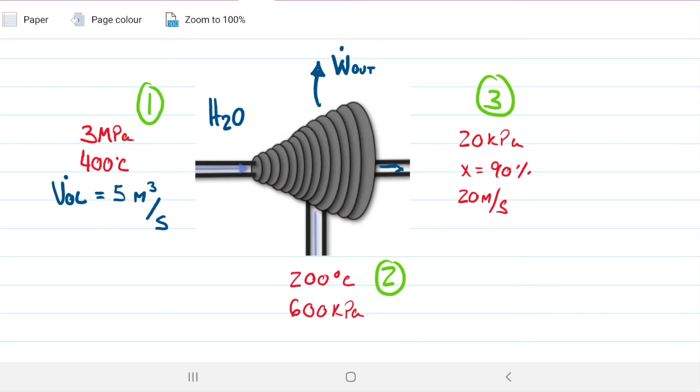The idea is quite simple. We have a turbine, represented by this guy here, and we have steam coming in, and we have steam coming out from two different outputs. And the idea is to apply the continuity equation to find what are the outputs in terms of mass flow rate and volume flow rate.

Now, the continuity equation tells us the following. If we have a steady state, that is, a state in which we have a constant flux of mass coming in and out of our control volume, which is our case here, if you take this as being our control volume, then that means that all the mass coming into this guy eventually leaves from one of the exits that's possible. In other words, we won't have water accumulating inside this control volume over time. We're always going to have that constant mass, so we're not going to have the amount of mass increasing or decreasing in the control volume over time. That's the idea behind the steady state, and that's when the continuity equation can be applied.

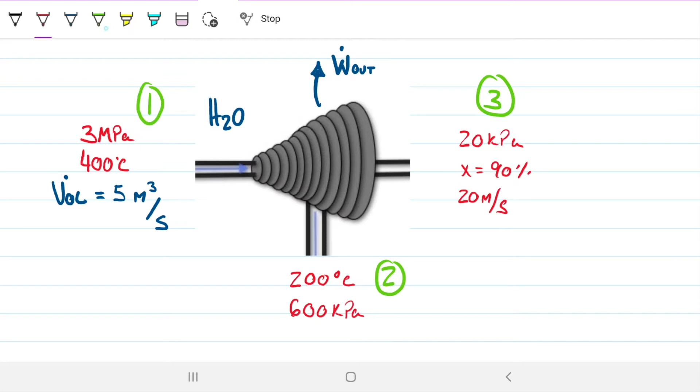So let's read the problem statement. A steam turbine receives 5 meters cubed per second of water vapor at 3 megapascals, 600 Celsius. The turbine has an intermediate phase where steam is extracted. The temperature and pressure of the steam in the extraction pipe are equal to 200 Celsius and 600 kilopascals. The pressure and the quality in the main discharge pipe of the turbine are equal to 20 kilopascals and 90% respectively. Knowing that the mass flow in the extraction pipe is equal to 15% that of the incoming vapor, and that the speed in the main discharge pipe is 20 meters per second, we are to determine the volumetric flow rate in the extraction pipe and the diameter of the main turbine discharge.

So it wants the volumetric flow rate on the extraction pipe and the diameter on the main discharge. So let's write this down quickly. Volume flow rate, I'll define like so, with the dot to indicate it's a rate instead of V, because we also have velocity in this case, so not to be confused. So I'm going to use vol for volume and V for velocity, and the diameter of one of the states.

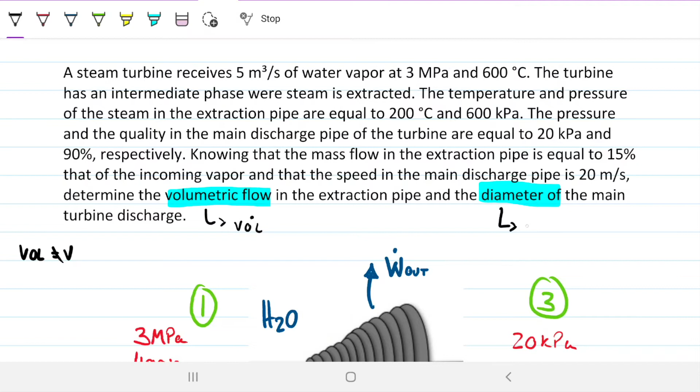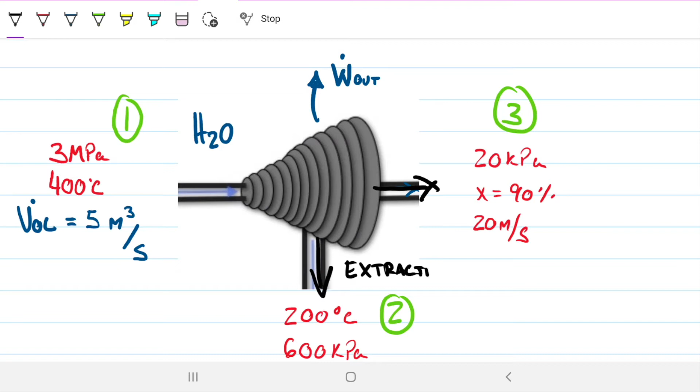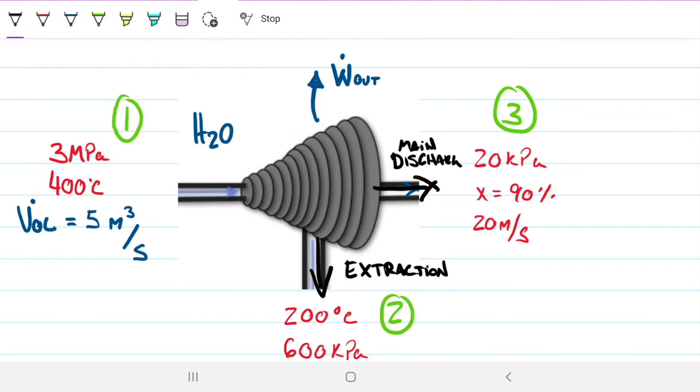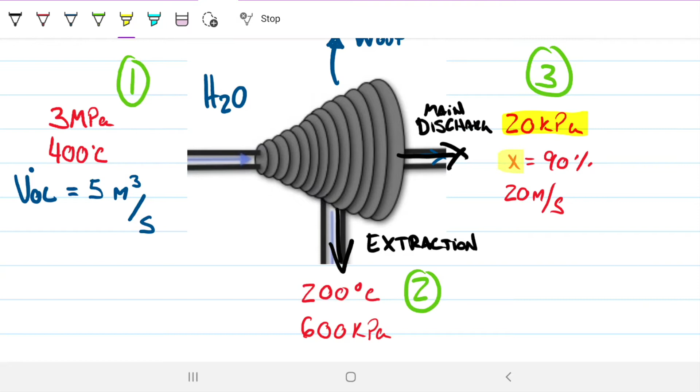So note that we have water coming in, vapor coming in, steam coming in here, and then we have two different places in which the steam is coming out. We have a discharge pipe there, we have the main discharge. So this is the one they call extraction pipe, and this is the main discharge. I've named them state 1, 2, and 3. I want you guys to notice that we have these states completely defined at every single instance: 3 megapascals and 400 Celsius, so two independent thermodynamic properties; 200 Celsius and 600 kilopascals, completely defined; and 20 kilopascals and quality of 90%.

So we can grab all the properties we wish for these guys here, that's 100% okay. Now, the other thing is that because of the continuity equation, because the mass is not staying inside that turbine, well, we can say that the mass flow rate 1, that is the amount of water coming in, has to be equal to the sum of the other two discharges coming out.

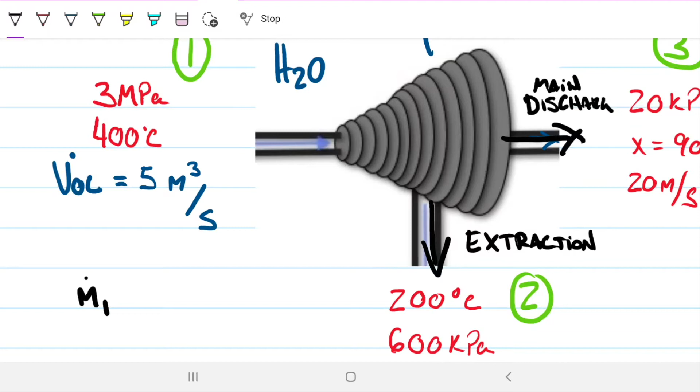Another way to think of this is like so. Let's draw quickly my turbine, just a little box for the turbine. What's coming in? We have state 1 coming in, and what's leaving in terms of mass, not in terms of energy, just in terms of mass. We have the extraction pipe here, which we call M2, so mass flow rate M2 for the extraction pipe, and a mass flow rate M3 for the main discharge. And incoming, we have mass flow rate 1.

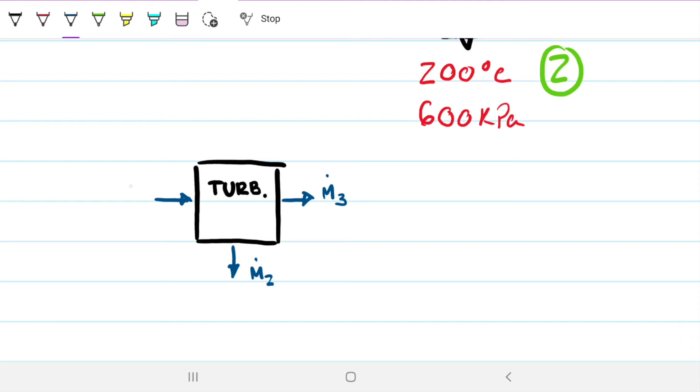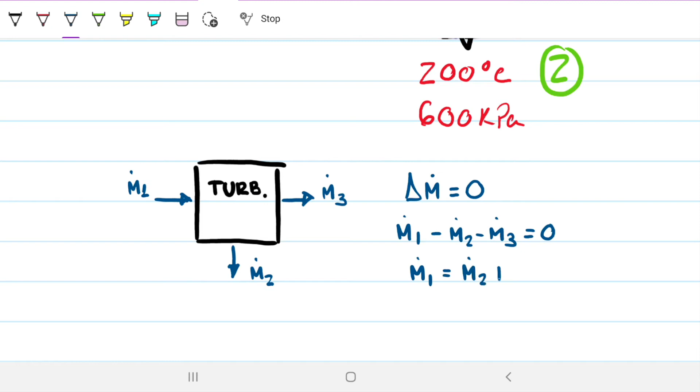So all the continuity equation is telling us is that the delta M has to be 0 as well. In other words, what's going in, M1, minus what's going out, M2 minus M3, has to be equal to 0. So the mass coming in M1 has to be equal to the mass leaving from M2 plus M3. What else do we know? We have an extra bit of information, which is that it's 15%.

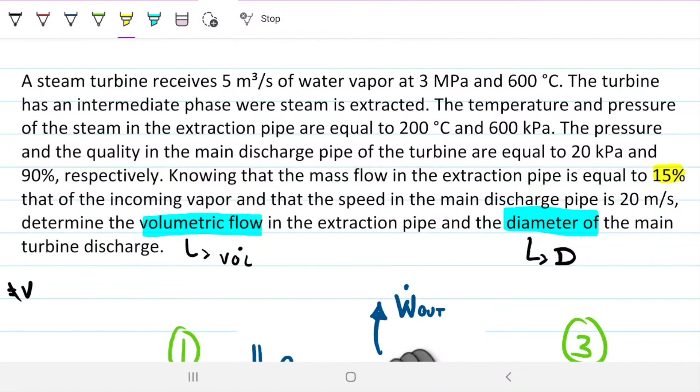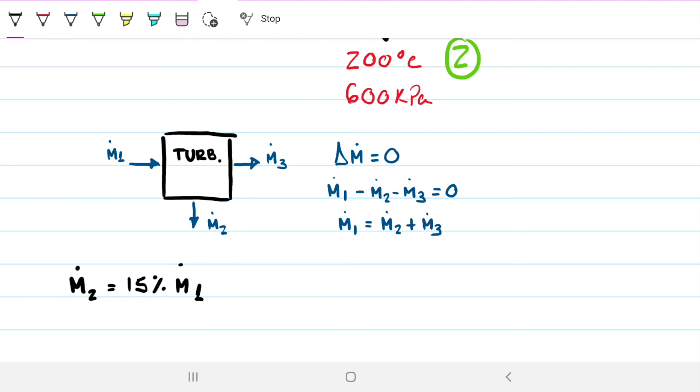Why is it saying that? Right here, we know that the mass flow rate in the extraction pipe is 15% of the incoming vapor. So this guy here in the extraction pipe is 15% of this guy here. So we can write that as well, as a second bit of information: the mass flow rate 2 equals 15% that of mass flow rate 1. So what we can do now is relate these volumes and masses and find everything we're looking for. We don't need to do any energy balance in this case.

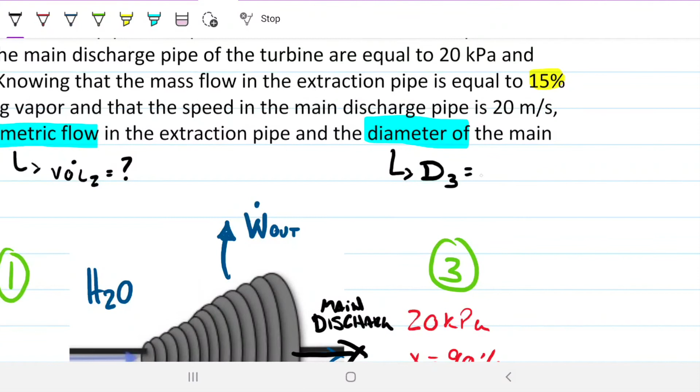Volumetric flow rate for extraction 1, that is volumetric flow 2, so this is what we're after, and also the diameter on the main discharge pipe, that's diameter 3. Okay, let's start with the volumetric flow rate.

I'm going to note that I can find the mass flow rate 1, because I know the volumetric flow rate of 1, and I can easily find the specific volume for 1. You don't need to memorize this, just look at the units: the volumetric flow rate is meters cubed per second, and the specific volume is meters cubed per kilogram. So the meters cubed go away and we're left with kilograms per second.

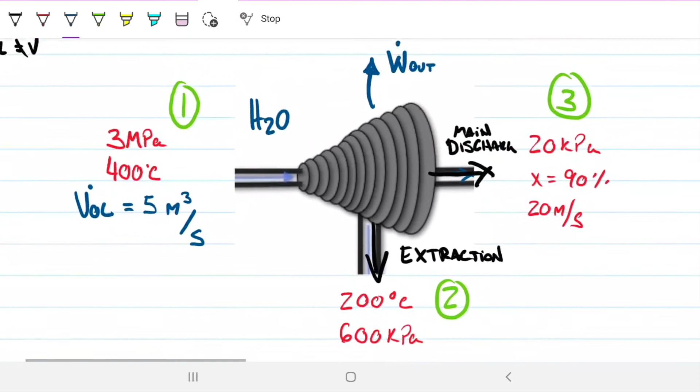That's exactly the mass unit for the mass flow rate. So that means that if we take the 5 that we already have and divide by the specific volume, we can find the mass flow rate. Let's just make sure we know what these guys are. As I said, they're completely defined, but let's confirm whether each state is saturated, compressed, or superheated.

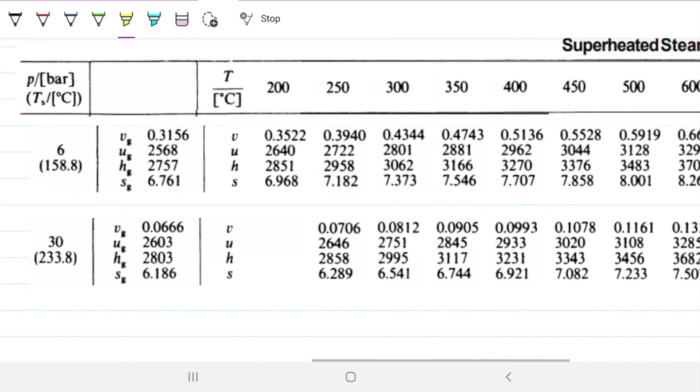State number 1, 3 megapascals and 400. I have the table down here. We're going to look for the 3 megapascals, that's 30 bar. This is the superheated table, sorry, let's go to the saturated one. There you go, 30, right here. The saturated temperature is 233. Our temperature is 400, which is greater than 233. So we know that state 1 is superheated.

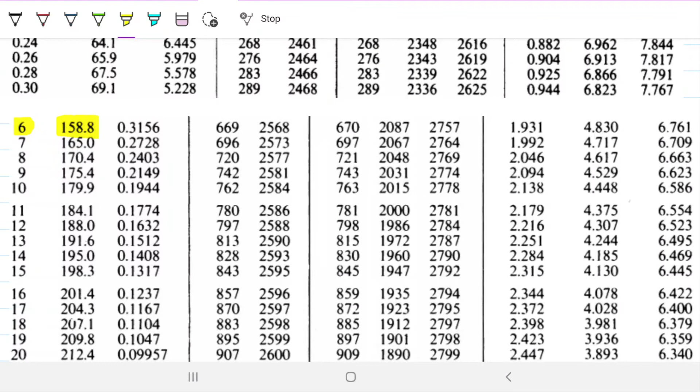Next state, state 2, 600 kilopascals. So let's go to 6 right here. The saturated temperature is 158. Our temperature is 200, so again, 200 is greater than 158. Therefore, state 2 is superheated. So those two are superheated.

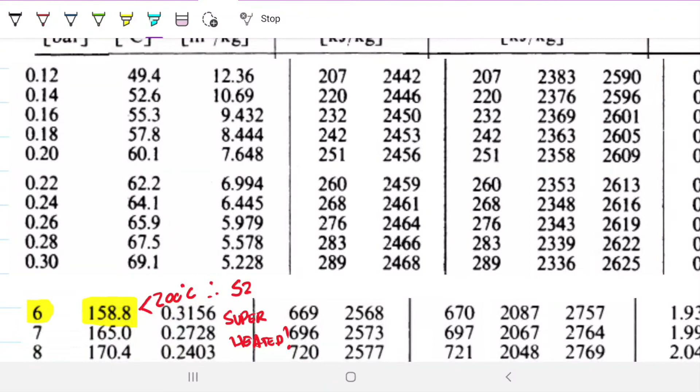And state 3, the main discharge, that's 20 kilopascals and quality of 90. So we know it's not superheated, because it has a quality, we know by definition that's going to be a mixture. This is the pressure here, 0.2 bar, same as 20 kilopascals. And we know that our specific volume for that guy is going to be 90% of this, plus 10% of the liquid that we can grab later.

Okay, so state 1 and 2 are superheated, so I need to go to the superheated table. That's why the superheated table is here. For state 1, which is 30 bar or 3 megapascals, our temperature is 400, so I'll be looking here at 400, and these are the properties I can get for state 1. I'm interested in the specific volume, which is 0.0993.

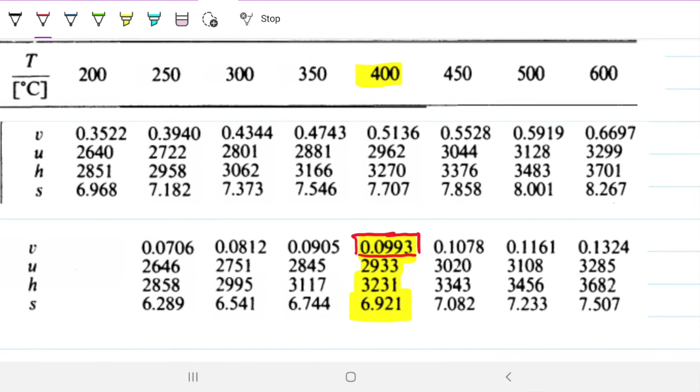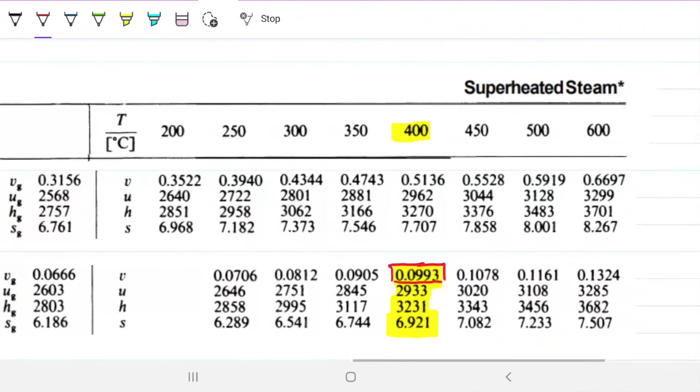Is that 300? Oh, it's 600, my apologies. Not sure what I had. 400 there, 600. Okay, so going back, not this column here, but this column here, 600. Our specific volume is 0.1324. Great, so that's the one we're looking for.

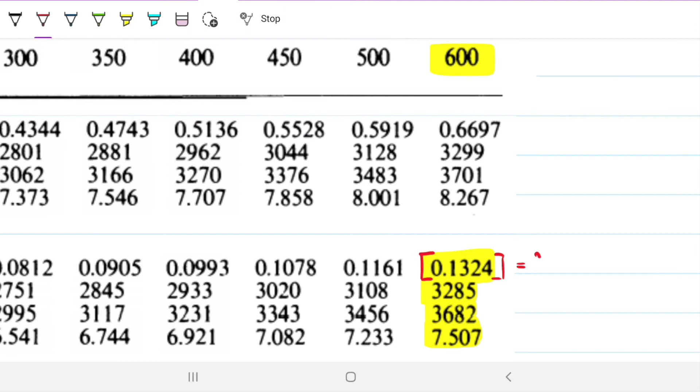Remember, this is specific volume 1. So if I divide 5 by 0.1324, I can get the mass flow rate 1. And I got this to be 37.76, which is, like we checked, kilograms per second.

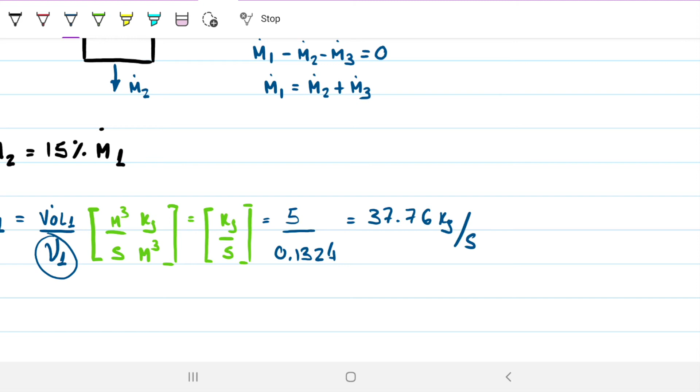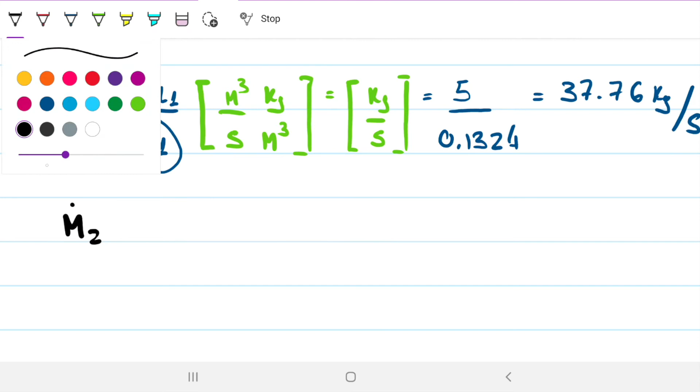But now know that we have only 2 equations and 2 unknowns, right? Because we know this information here, we can find M2 with that, and then we can use this one to find M3. So as easy as that, let's do M2. M2 is 15% of 37.76, so M2 has to be 5.66 approximately, also kilograms per second.

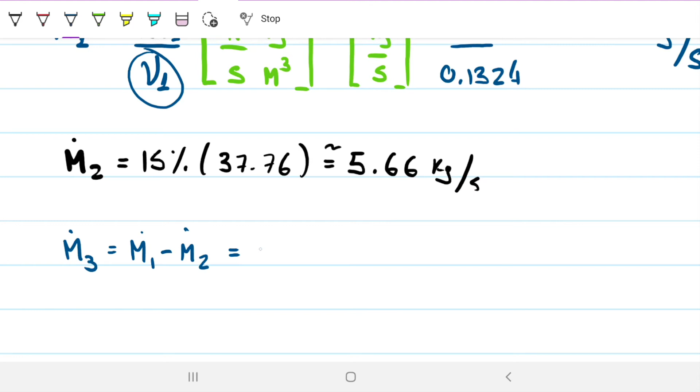And if I apply the continuity idea, then M3 is whatever is coming in minus whatever is leaving on the extraction pipe. And that difference is 32.1 kilograms per second. Amazing, so we have all the mass flow rates.

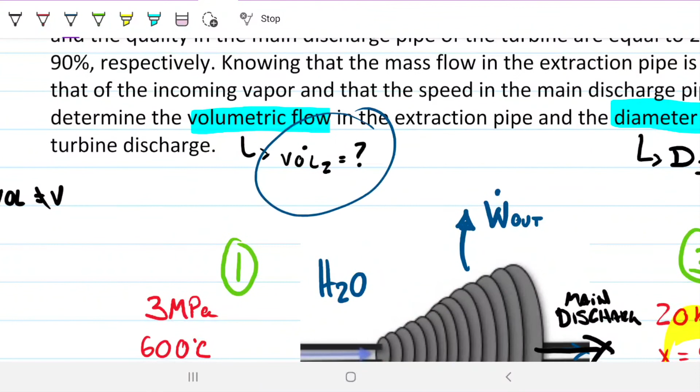Now, our unknowns, remember, we're trying to find volume flow rate on the extraction pipe, so volume flow rate 2. What do I need for that? Well, we can use exactly the same idea as this guy here, because I know the mass flow rate, and I can find the specific volume. If I do that, then I can find the volume flow rate.

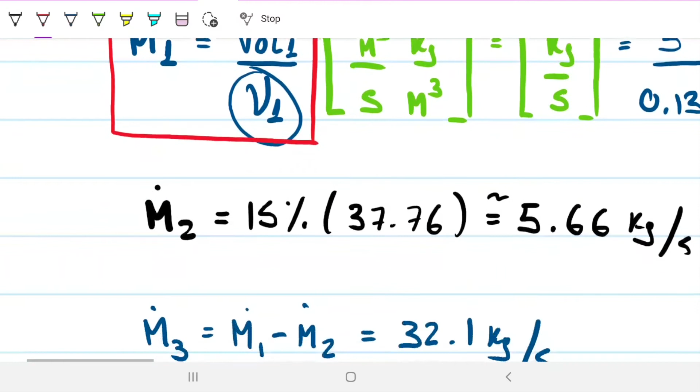Volumetric flow rate, so let's try it the same way. The mass flow rate on 2 is the volumetric flow rate 2 divided by the specific volume on 2. So therefore, the volumetric flow rate on 2 will be equal to specific volume 2 times the mass flow rate 2. We know this guy, just need to grab this guy and be on our way.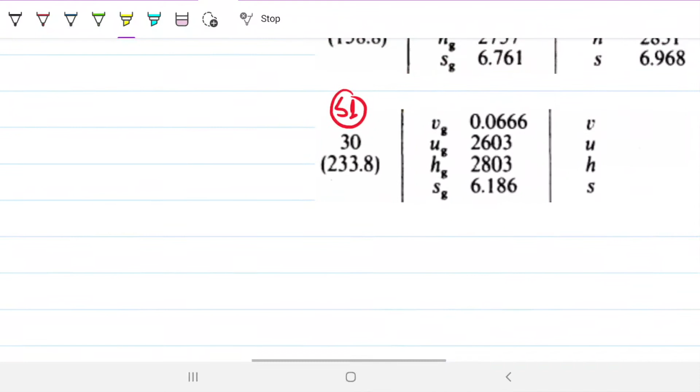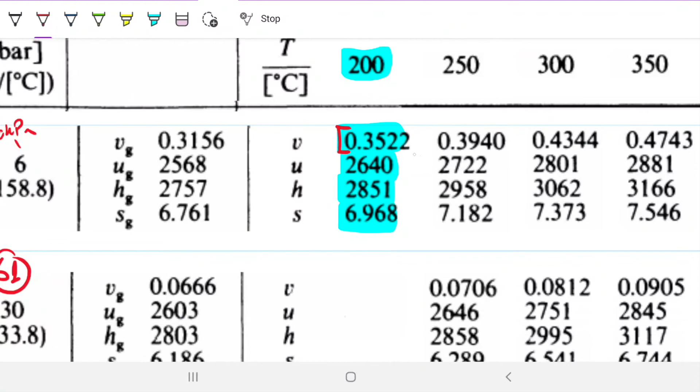So state 2, that's superheated as well. We know that's 600 kilopascals and 200 Celsius, so that's why I have this 6 bar here, same thing as 600 kilopascals. We're looking for the 200 Celsius, so this column here is the one we're interested in. And within this column, we're interested in the specific volume: this value here, 0.3522 meters cubed per kilogram.

Okay, so the volumetric flow rate will be the mass flow rate, 5.66, times the 0.3522, which gives me 1.9934, and it goes on. We can approximate that. So the volumetric flow rate 2 is approximately 2, right? 1.993, so that's good enough to go to 2. So 2 meters cubed per second.

Checking units, always do that. So this guy is kilograms per second, and multiplying that by the meters cubed per kilogram of the specific volume, so meters cubed per second. So this is one of the answers we're looking for.

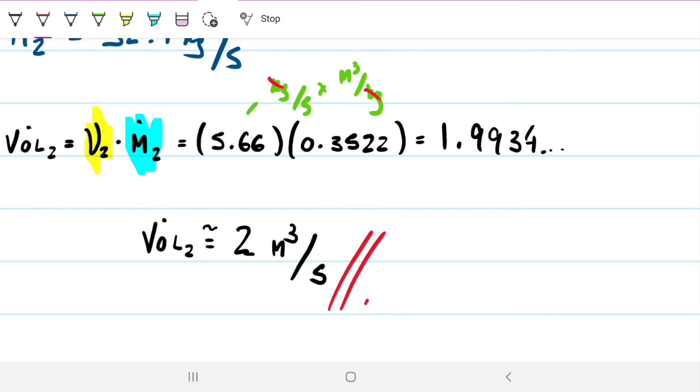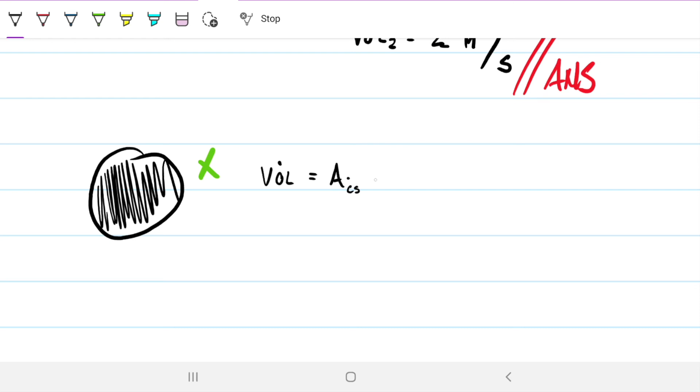Next part, we're looking for the diameter on the main discharge pipe. Remember, think of it looking down the pipe, right? So this is the cross-sectional area here. If we have a certain velocity going through this pipe, going in the direction through the screen here, and then multiply that by the area, what we're going to be finding is actually a volumetric flow rate. So the volumetric flow rate can also be understood as the cross-sectional area multiplied by the velocity, transverse velocity in respect to that area.

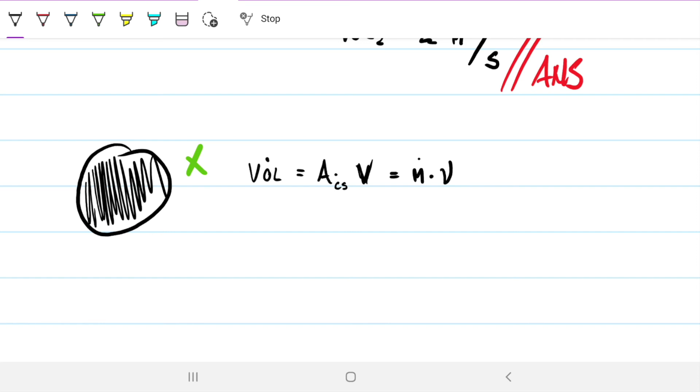So we have the velocity on 3. And we also know that this, from what we just did, is equal to the mass flow rate times the specific volume. So thinking for 2, these are all going to be for 2, obviously. We can think of it as the cross-sectional area on 2 times the velocity on 2 will be equal to the mass flow rate of 2 times specific volume on 2. Excuse me, 3, right? This is the main one, not the extraction one.

On 3. Now we can convert the area because we know that an area is just pi r squared, or pi diameter squared over 4. This is diameter for 3, and that's what we're looking for. So we can rewrite this and solve for the diameter: diameter of 3 squared will be equal to the mass flow rate for 3 times the specific volume for 3, divided by the velocity for 3, times 4, divided by pi.

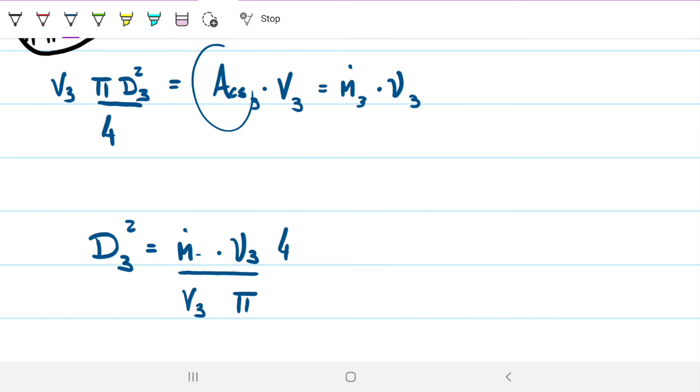Okay, so we have all this information. The only one we're missing at the moment is the specific volume for 3, which we can grab. Let's grab that, and then we can finish off this problem.

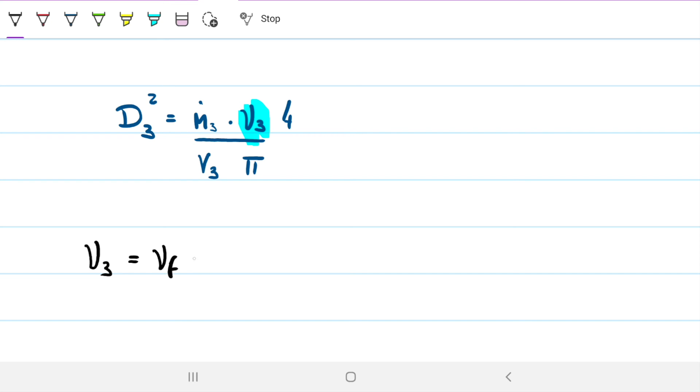Specific volume for 3, we know that 3 is a mixture, so we can do VF plus X times the difference of VG minus VF, or we can do the old-fashioned way, which is whatever is steam times the specific volume of steam, plus whatever is not steam, 1 minus X, times the specific volume for the liquid. They're the same thing. So let's grab these two values that we need, because we know that X is 90%, 0.9.

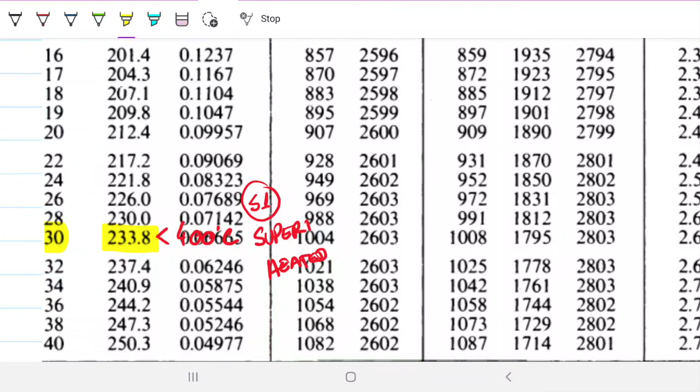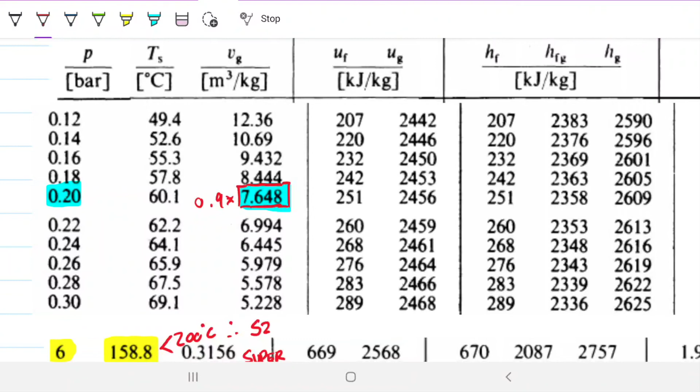For the steam one, we go back to where we were before. We're looking at 20 kilopascals right here, and this is the one we're looking for. So we're going to take this guy and multiply by 0.9, since we have 90% steam. And then 0.1 is liquid, and that's going to be a small influence.

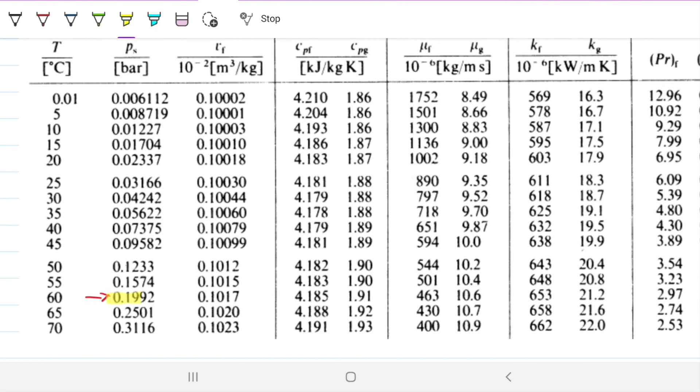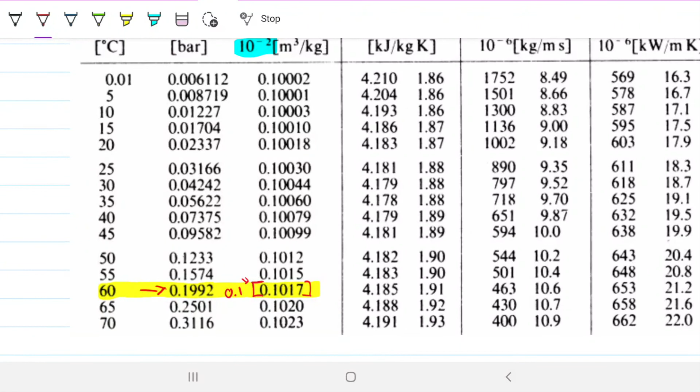So I have the table down here for the properties of water. We're looking at 0.2, but we don't have exactly 0.2, we have 0.199, times 10 to the minus 2. And this is the specific volume for the liquid: 0.001017. You know this is going to be such a small contribution, it's 10% of this guy, so it's this value divided by 10, 0.0001017.

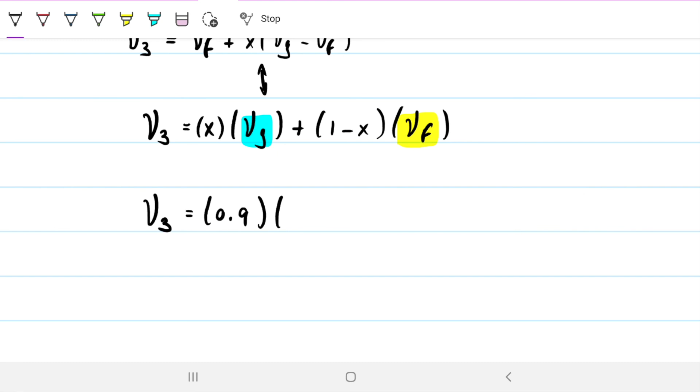That's a very, very small contribution, so it doesn't really matter whether we do the interpolation here or not. You can do it, you can find an even more precise value, but you'll see the specific volume is not going to change much, because our specific volume for 3 will be 0.9 times 7.648, that's the one for the steam, plus 0.1, the 10% remaining, times 0.001017. Note that this is going to be very small compared to the other term.

And indeed, I got the specific volume for 3 to be 6.88 meters cubed per kilogram, and that's what we're going to plug in, 6.88.

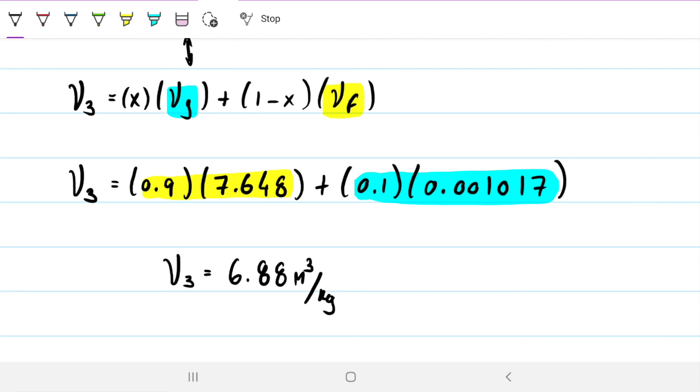So let's do this. Diameter squared will be equal to the mass flow rate, that's 32.1 that we found before, times the specific volume we just found, 6.88. 4 is a constant, no unit there. Velocity was given in the statement as 20, and pi is a constant as well.

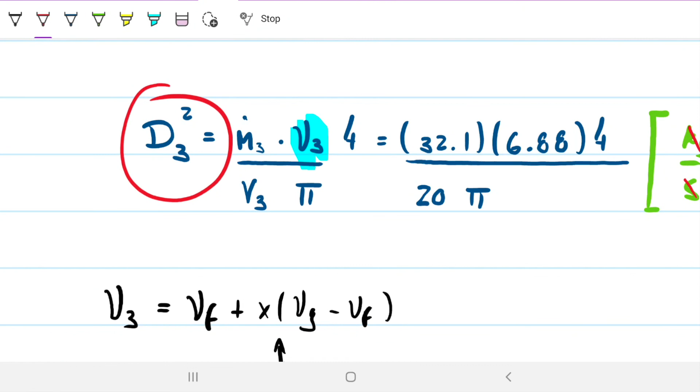Unit-wise, what do we have here? We have the mass flow rate, kilograms per second, the velocity, meters per second, and the specific volume, meters cubed per kilogram. Seconds with seconds, kilograms with kilograms, meters with meters cubed, we're left with meters squared. And that makes sense, because we're squaring the diameter still, so whatever we get out of this is the square of the diameter, meters squared, makes sense. So what did I get out of here?

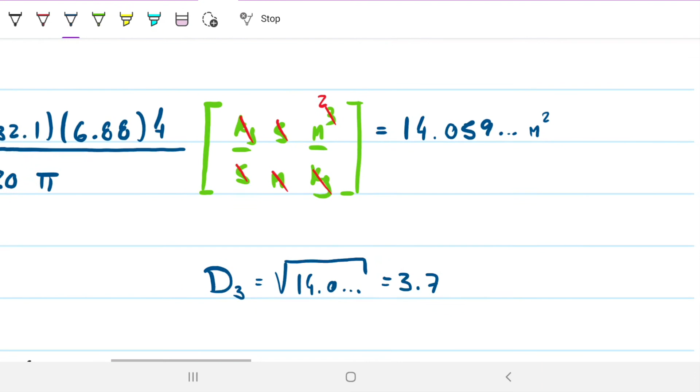14.059, keeps going, and we're going to take the square root of that. This is meters squared. So the diameter 3 will be the square root of that value, the 14.0, and this gives me 3.7496. Let's go ahead and round it up to 3.75.

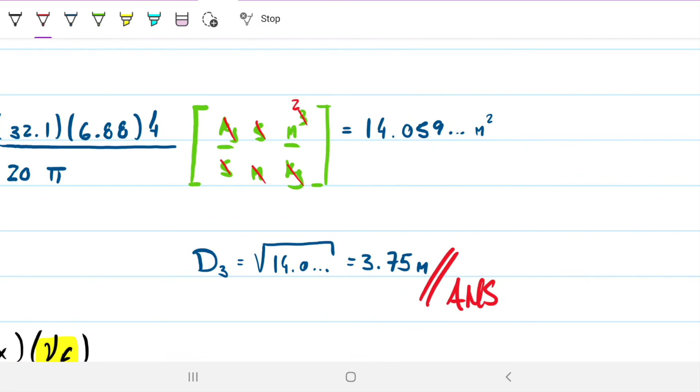Okay, there you go. So now we know the diameter on the main discharge pipe, that's 3.75, and we also know the volumetric flow rate on the extraction pipe.